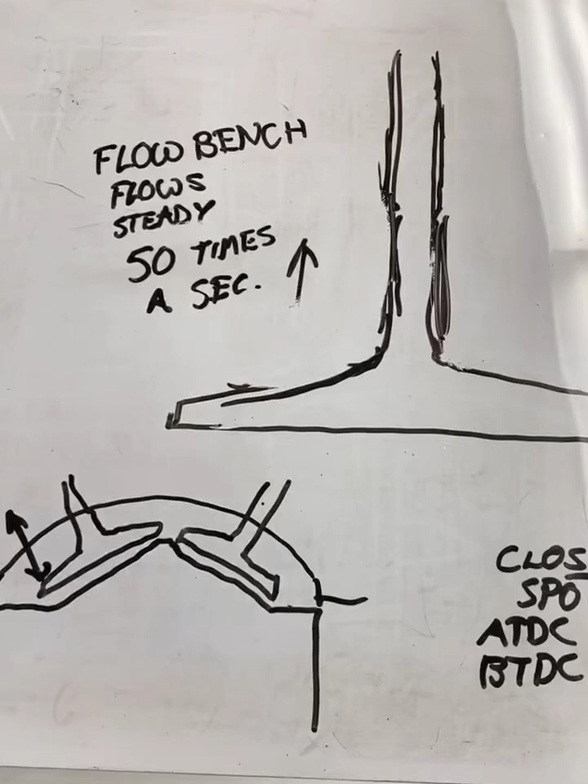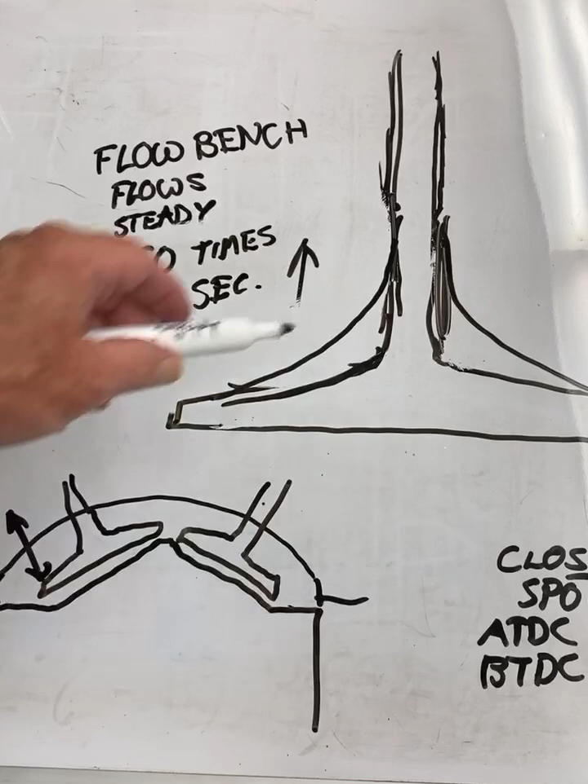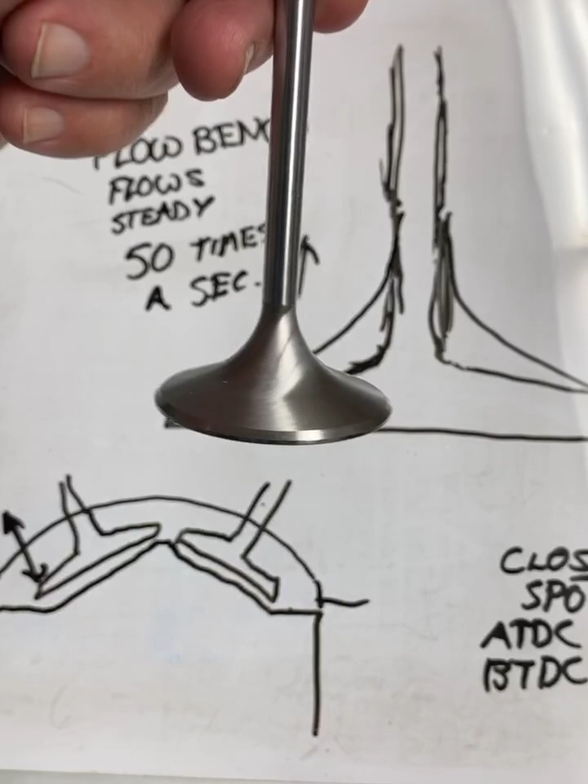Newfangled gadgets, isn't it? Hey Jimmy, I know y'all laughing at me because I hung myself up. Let's see if I can get this to line up. Look at that. Be careful not to touch the phone. But I got that valve to almost line up with my drawing. How about that?

But anyway, Bruce, Mo, Adrian. So anyway, back to my story.

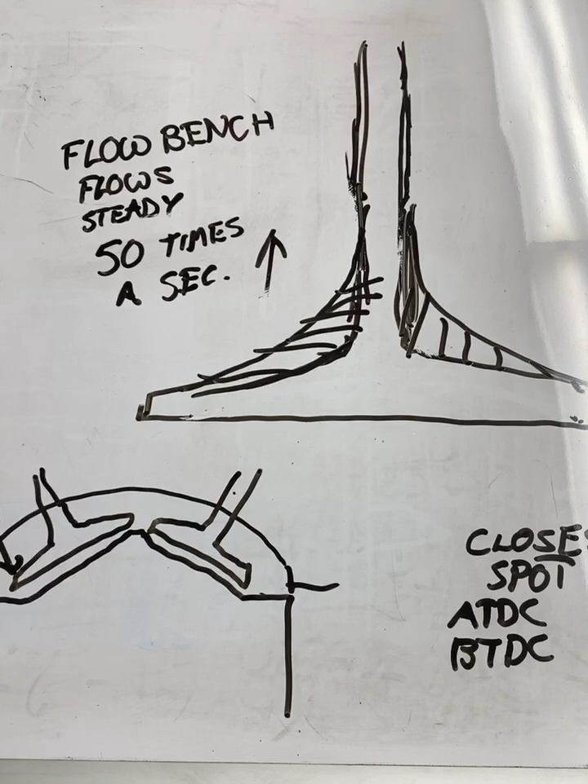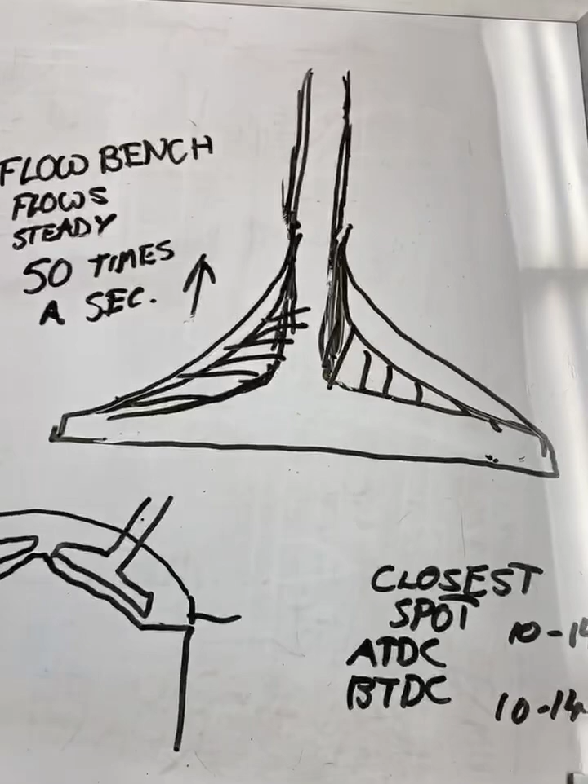In reality, this added so much mass, so much weight, that the spring couldn't really control this valve to open and close it fast enough to make any power. Back in the day, 50s, 60s, 70s, maybe even longer ago, it was a really cool idea to come up with a valve shaped like this because it looked like it would flow a lot. And it probably did on some old archaic flow bench that only would show an 8-inch, 10-inch depression through the port and around the valve.

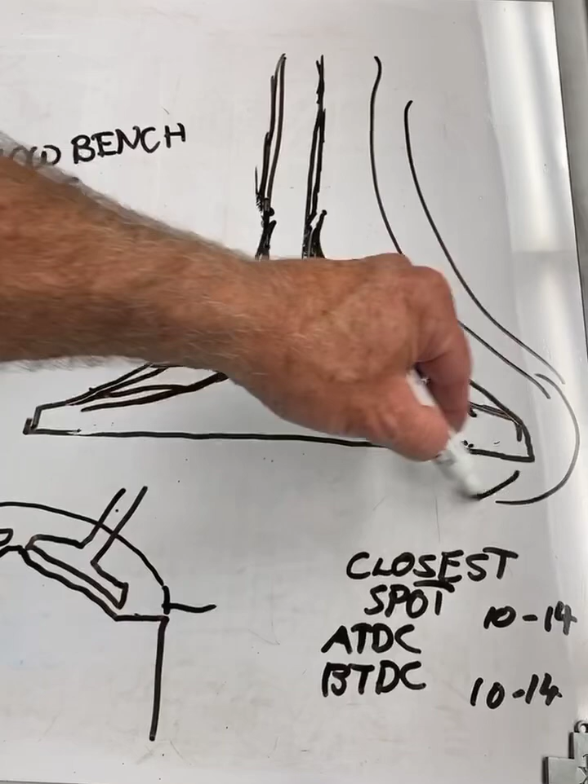So when you're running the air really slow, it turns nice, it goes around nice, all these things go around nice. But if you've got that bad boy on a hurricane pace where the air is coming in so fast, and the engine, the piston's going up and down so fast, and the valve's coming up and down so fast,

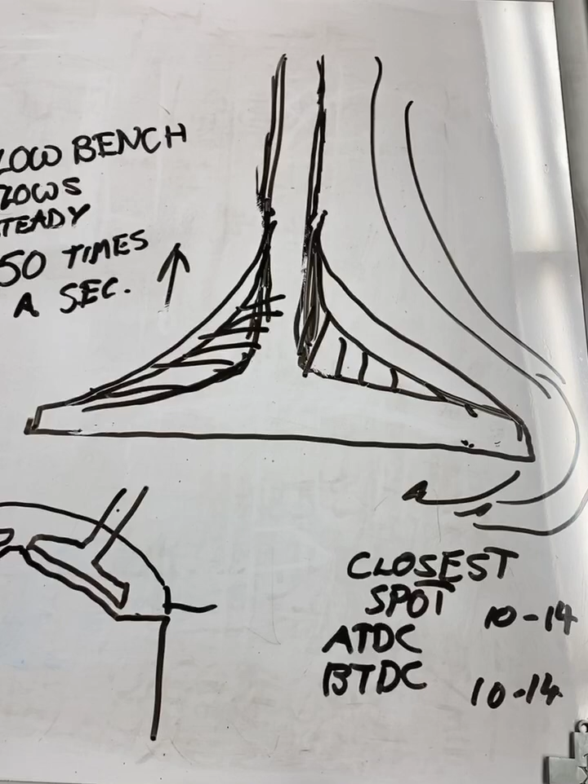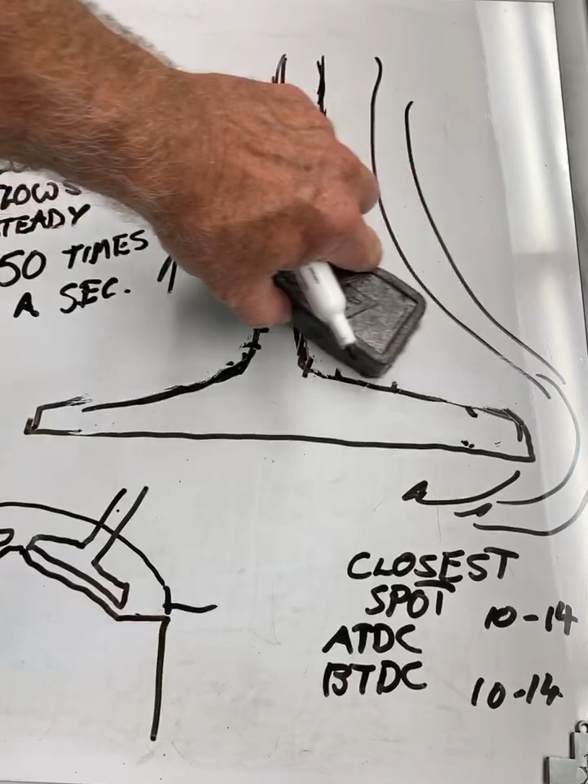that the flow bench is a tool that helps us answer a question, but it doesn't answer all the questions. So the shape and the size of the port is very, very important as well.

Because on a 6,000 RPM engine, and you guys can double check me on the math, but don't stop watching to do the math, okay? But I got it figured out. I'm somewhere close. At 6,000 RPM average going down the racetrack on a Harley or some Chevrolet, Chrysler, Ford, Buick, or Jeep, maybe an Oldsmobile. 6,000 RPM average.

Honda, Kawasaki, whatever, it's 6,000 RPM. That's 6,000 revolutions a minute. Divide it by 60 seconds, so you get 100 times a second. The intake valve goes up and down half of that. So I'm going to just say off the top of my head that the intake valve goes up and down 50 times a second.

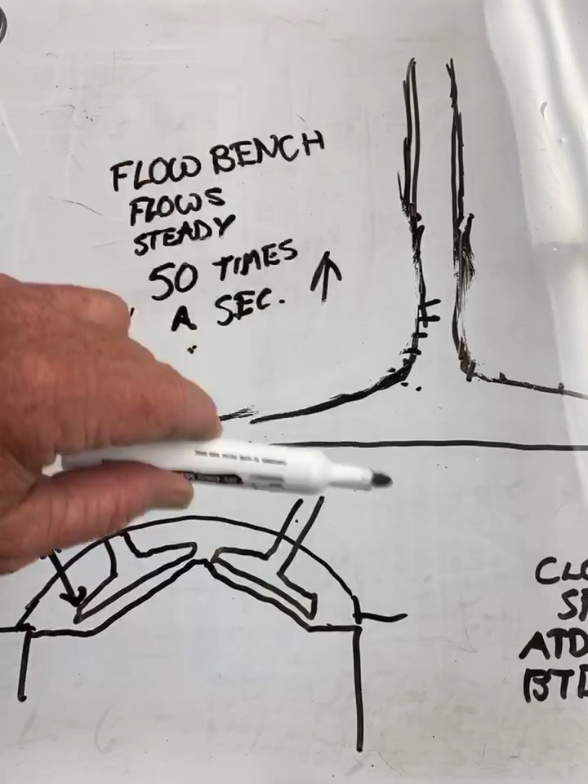Now, I can't move this valve 2 times a second. I can't move it 10 times a second. But this valve is going up and down so fast in 1 second, and it has to seal 50 times a second.

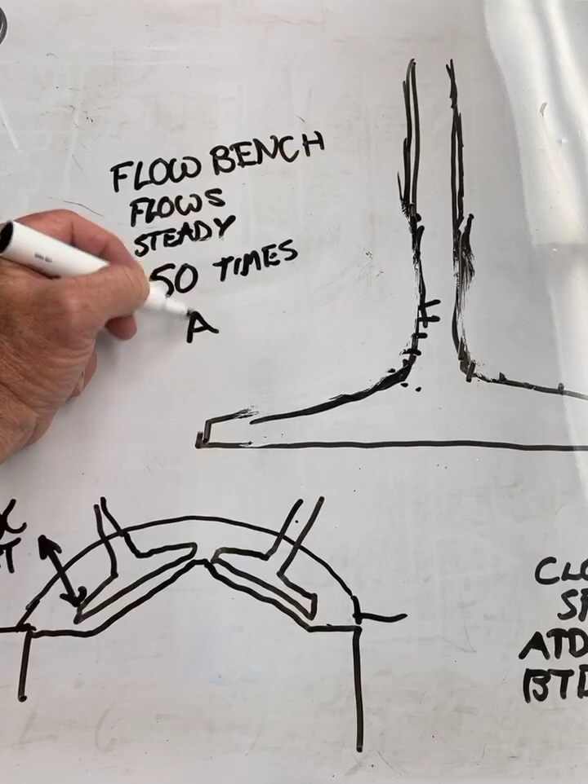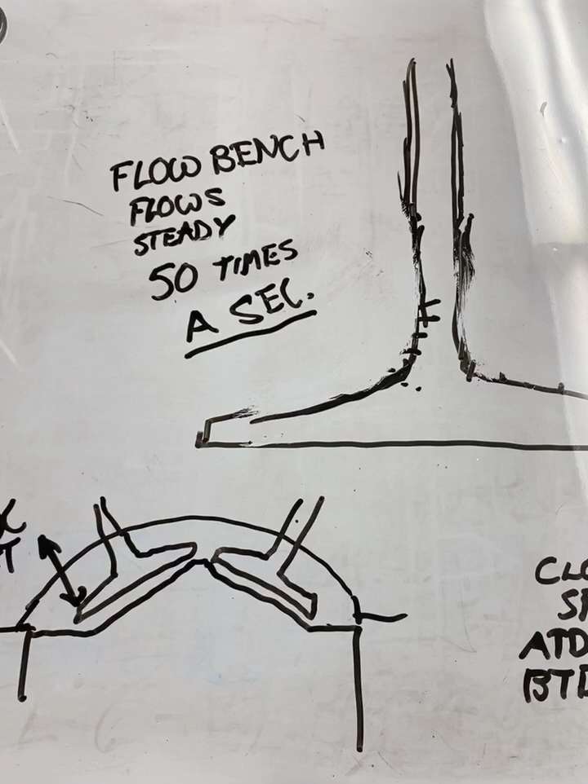That's metric too, y'all, second. That right there is the same as metric. Did you know that metric people in the world use the same measurement of time as regular folks like we do in America? Yeah. A second. They use that in Australia, Germany, France. 50 times a second, same measurement. I know I'm being stupid.

But this valve has to seal on the seat of the head 50 times a second when you're averaging only